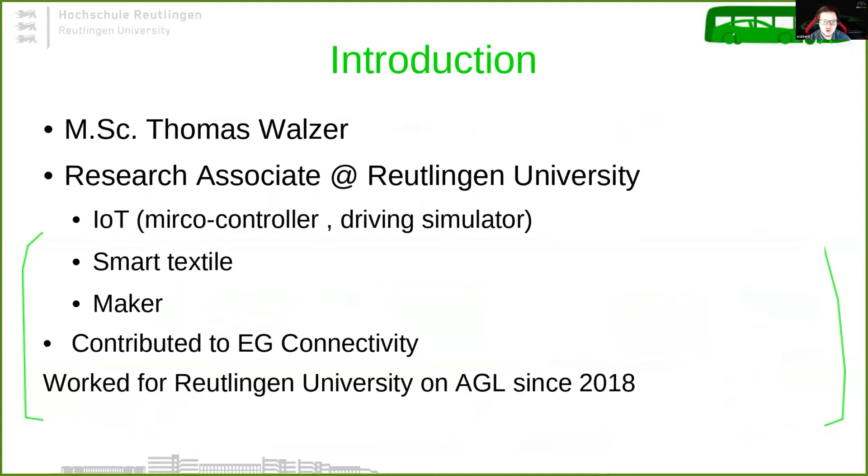So I worked for Reutlingen University on AGL since 2018. My work was from the sensor to the backend, all around AGL, with open source software and open hardware or our self-made hardware, and a lot of management of the students' projects. Before we started with AGL, we had a driving simulator from a PhD thesis. The focus was on the driver data and CAN data generated from it.

The purpose of this PhD thesis was the development of a driver assistance system. And we had no actual human-car interaction. It was just the notifications from the car. But that gave us the basic idea for AGL. I did my bachelor thesis on that topic, and I did something service-based on Java OSGi to have an infotainment system. And it didn't work that well, so later we found AGL and started.

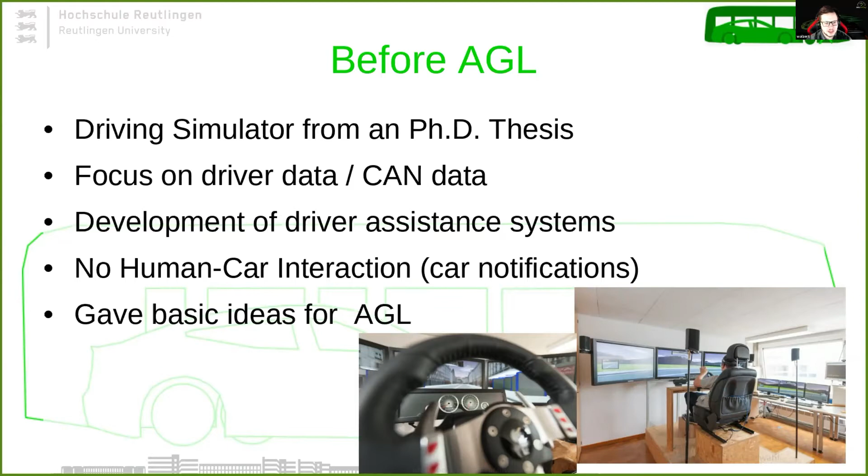Our vision for what we did at Reutlingen University was to create a modular driving simulator environment that could be used at Reutlingen University for topics in automotive research and education. It should be a framework for textile and design. We have interior designers, and all the time I saw their cool models but they just had paper slides or something like this in their model. And that was so annoying, because we from the computer science faculty had the technology to bring technology into it. And yeah, that was a bit sad. So that was the idea, to give them an environment or a framework where they could easily work on better prototypes.

We have mechanics and mechatronics at Reutlingen University, and they are working on ECUs and all the stuff. So the idea was to bring them together with us, the computer science, with the driving simulation and the knowledge of AGL software. So maybe the vision was to create a small virtual car company at Reutlingen University that is more based on interaction, ECUs, and interior.

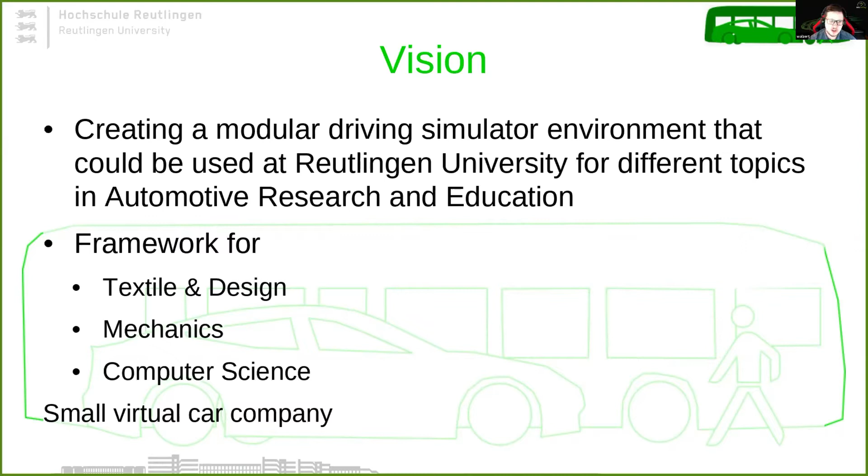So the vision of the actual driving simulator was a driving simulation that has only one connection to the outer world, so we shouldn't care about the simulation. We should have clear interfaces to get the values from the driving simulation into our system and back. The system should have AGL on board, at least in the IVI system, additionally with the IC. And it should be possible to make different car classes, for example trucks or small cars.

We are working with 12 or 13.8 volt power supply, as in a normal car at the moment, and it should be easily extendable with new hardware. For that, I designed an adapter for CAN modules for Arduino and so on via DB9 connector. And the idea was the image on the right side. So that was the basic idea when we started to create our hardware.

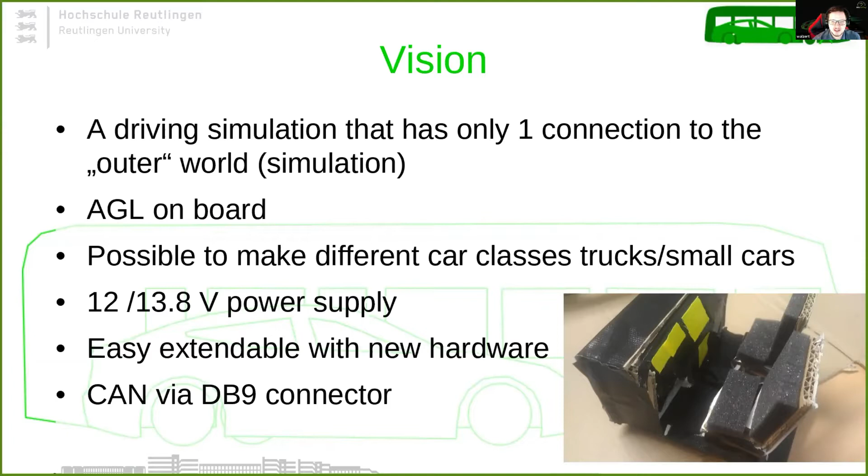And the concept for that was: we have a simulation. The simulation is connected via LAN to the car interface. You can see that on the right side. There's also the power supply for the 12 volts. And from there, we have the CAN interface that connects with different channels to the driving simulator. AGL, IVI, textile controls, and actuators are connected, for example, to one bus, the yellow; the gear, the steering wheel, and the pedals to another, the red one. So we want to separate that like it is in a real car.

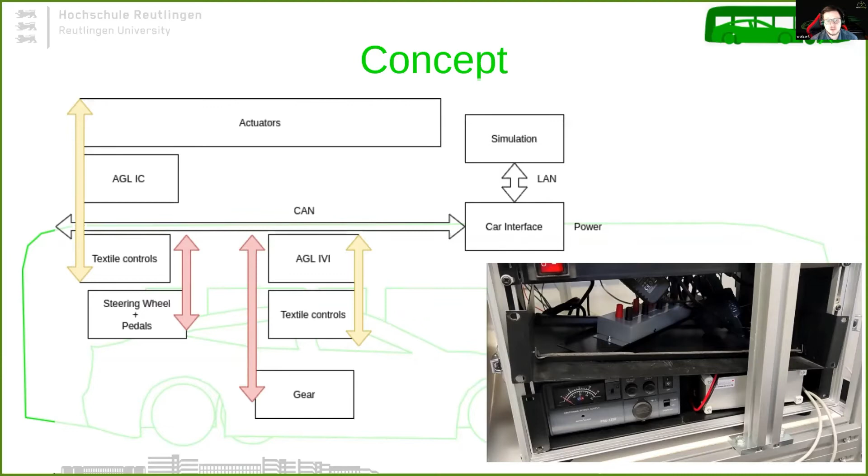So on the left side, you see the simulation that is just with a beamer. You see the backend, that was the part I showed before, and the red parts are on one CAN bus. So there's a steering wheel sensor with CAN bus, there are pedals, a shifter that was made out of a C64 controller, and you see the green parts here, AGL. The nice looking pictures are on the right side.

So you see the blue LEDs everywhere, and that is a smart textile. I will talk later about that. So it was a research project, and we worked on the topic of how to bring textiles into the car as interaction surfaces, to have a nice feel and not have the plastic parts. So yeah, we worked on that, and that is the prototype where we have it in.

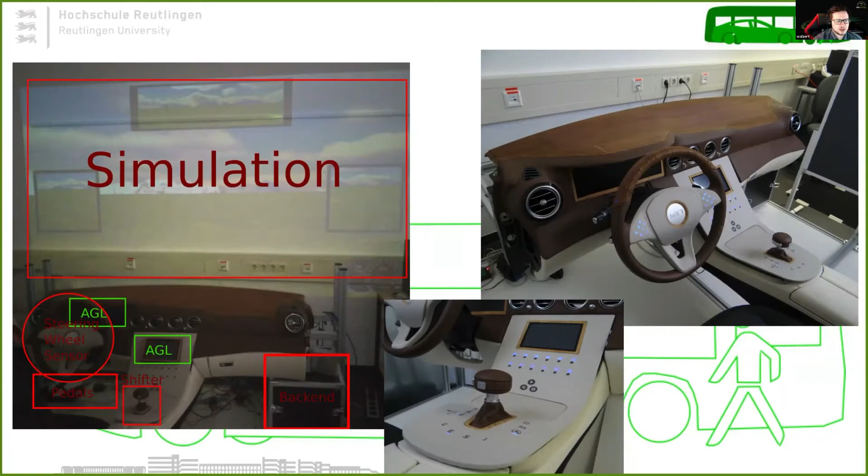So that is one part of the AGL platform. I was the maker, so sometimes it was rapid prototyping, not that polished. We worked on a CAN SL module, a socket CAN module with the microchip audio system and a touchscreen applied to that. On the left side, in the smaller picture, you can see our green box. Now it's formally black, but it's the same - the prototyping mobile development station that we had at Reutlingen University.

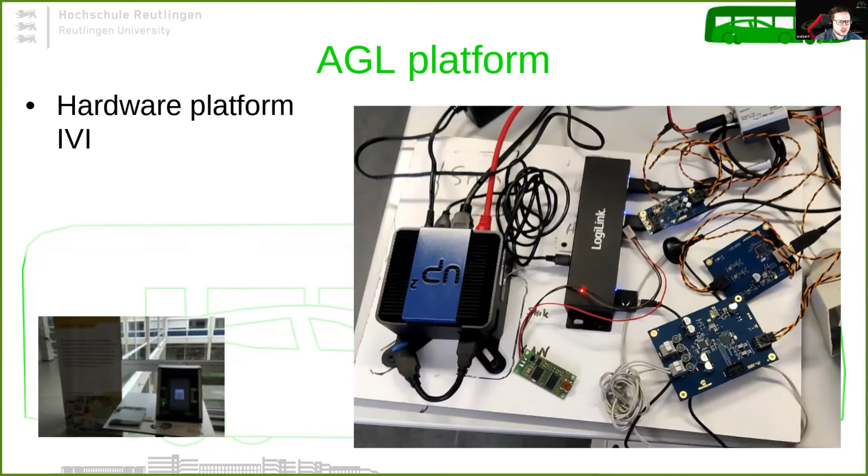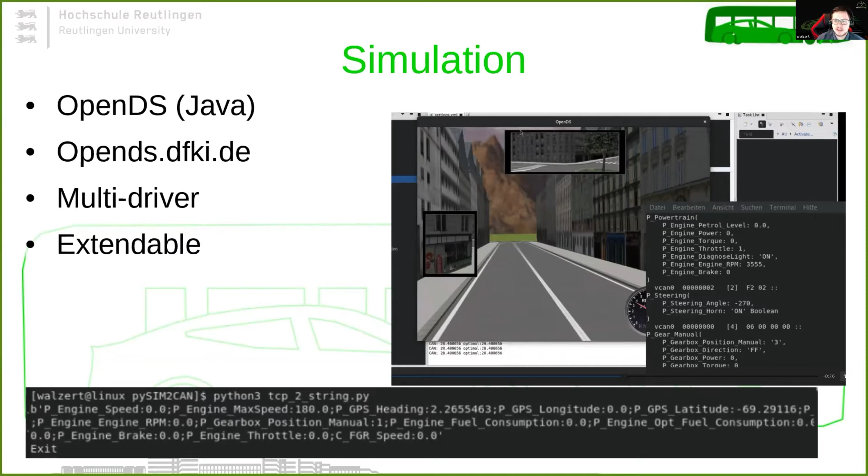So we send all the information to the next step, to the CAN interface. And then you can see in the terminal on the right side that we have the software that decodes or encodes the CAN messages from the TCP strings and sends it over CAN, here in that example on virtual.

So the CAN gateway where we're doing all this is based on the old driving simulator. We just ported the idea to Python and added a new CAN. The software opens a TCP server, which the driving simulation can connect to. The driving simulation sends strings with the car data to the server, so all updates of the driving simulation with speed, at an interval we can set, will be sent to the gateway.

The gateway gets the values and encodes them to CAN and sends them on the different CAN channels. We also have the steering wheel sensor that has actual CAN values, and we use those values, decode them, and send them to the driving simulator. So we could control the driving simulation with a real car.

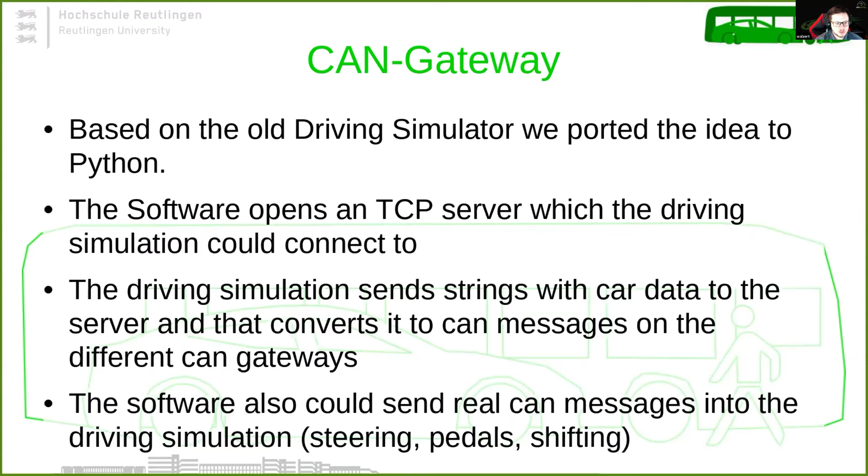The actual CAN gateway is a 6-channel gateway. It's working with the socket CAN drivers, and we have software prepared for the powertrain, the chassis, and the interior. So they are partly implemented.

On the left side, the motor and gear we get from the driving simulation and send to the CAN bus. The chassis network is where we get our real sensors and push those values into the CAN gateway to bring it into the driving simulation. We could use the distance sensor of the driving simulation and push that into the body, but we haven't done that yet.

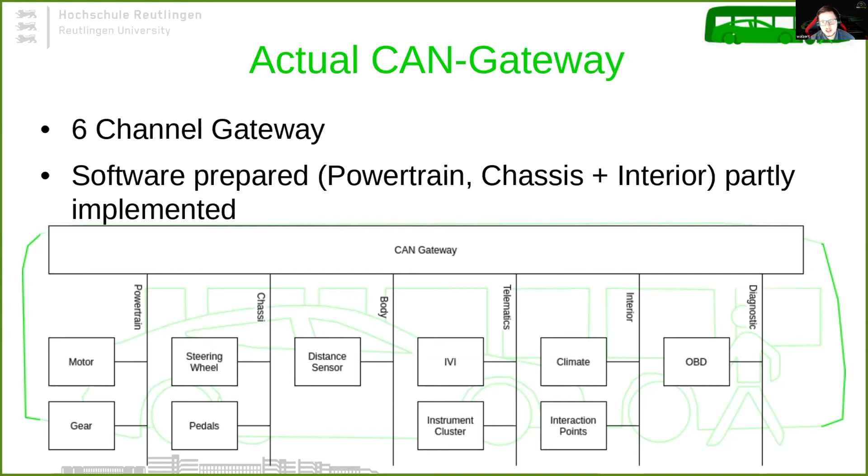And then we have a part with the telematics where we have the IVI system and the instrument cluster. The idea is to push all the important information from the other gateways into the telematics - that is, for example, the interior climate information that AGL could change, or our interaction points, interaction surfaces, that we could use the input of in AGL. And we have at least not implemented the OBD or OBD2.

What I did for all that was generate an AGL CAN format from DBC. So this is the CAN pipeline, and the idea was the students go and define their messages in CANoe, then create a database out of it.

We export that database and then use one part in our CAN gateway. So we just import that database via CAN Matrix and have the values in the CAN gateway, and can decode, encode it, and send the data.

The next part, where we did some work but it's not working at the moment, was converting that database to JSON, using a tool to convert that JSON into the right format for AGL CAN, and then creating and building the AGL CAN service for that.

So the idea was that in maybe 10 minutes you could create your new messages and signals and use them in AGL. Maybe add an Arduino with exactly the same information, and you can create a touch control or something like that.

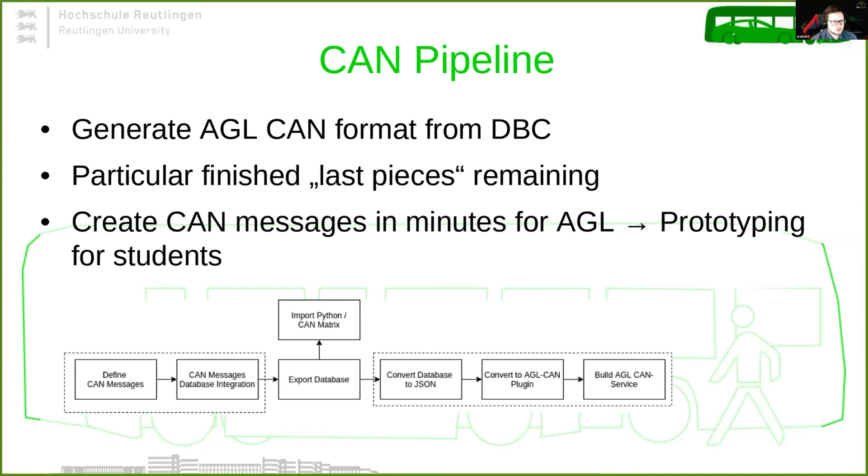So the system starts with PySim to CAN. That is the gateway software or server software we have at the moment. If that is started, OpenDS connects and sends a message, then the connection or simulation is starting.

We get the value from the chassis, from the steering, the pedal, and so on. Then AGL can connect to the car data and work with that. So that was the first prototype we did.

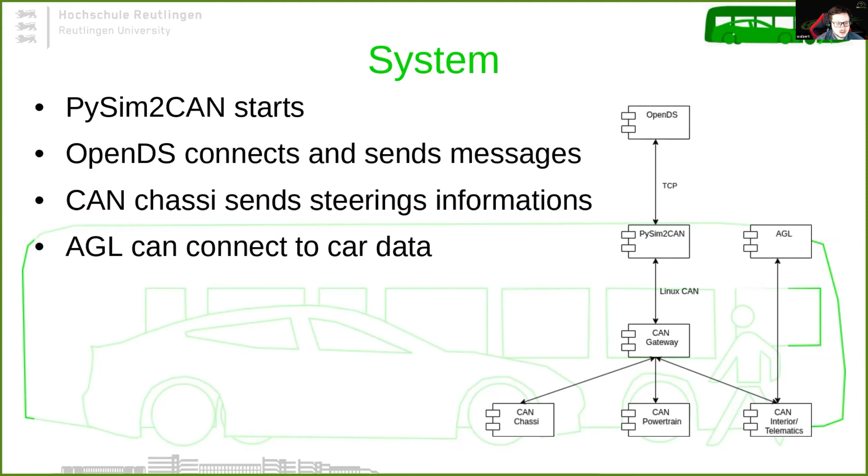Through the last year, I had to start bringing it to the students in a virtual way. So I made one VM. OpenDS is just a service, a software you can start on every machine. PySim to CAN and all the CAN gateway are virtual and in a VM. So we connect OpenDS with that VM and connect AGL through Cannelloni, which we included to the PySim to CAN connection.

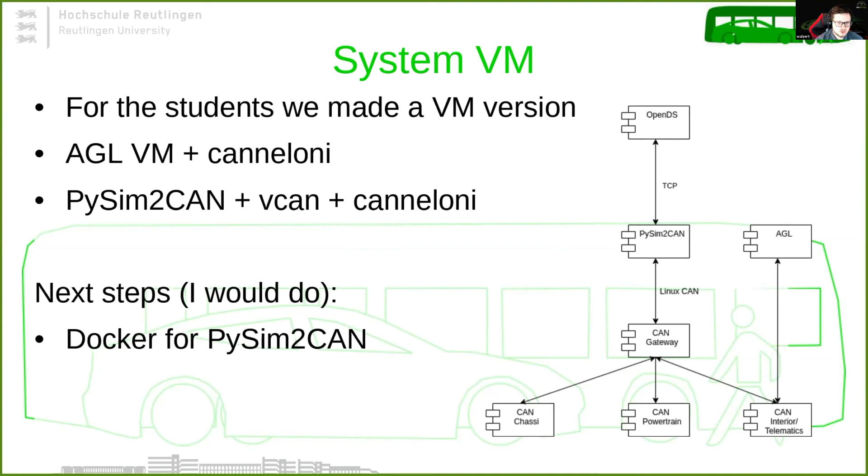So the next step I would do, if I could, would be to push all the Docker parts or all the stuff into a Docker container, because it was hard for some students to get VMs working. We had 5 different computers: on 3 the VM worked without problems, on 1 it worked with a bit of tweaking, and the last one wasn't working. So it was really hard to find a good configuration.

What I said before, we're using actual pedals, so they are on the left side where ADC. I converted the ADC to an Arduino digital signal, used an Arduino CAN device or CAN module, and sent the data. The steering sensor was sending the data directly. On the right side you can see our custom CAN adapter, a DB9 connector to CAN with 3 ports, a Y cable or Y adapter.

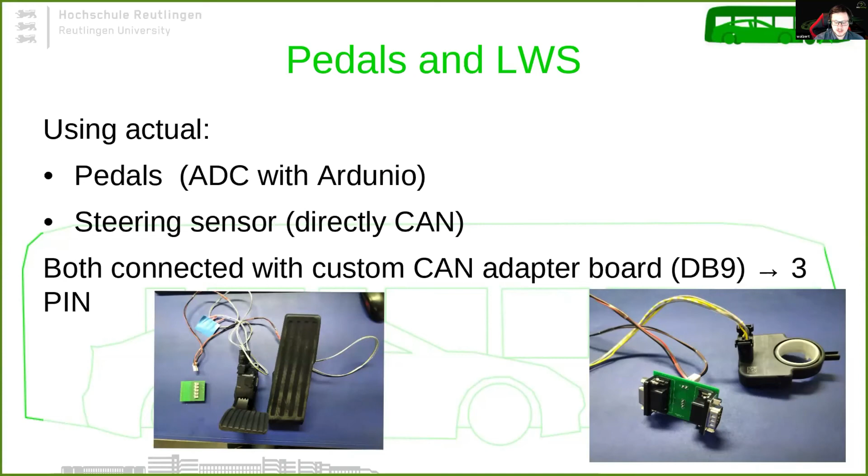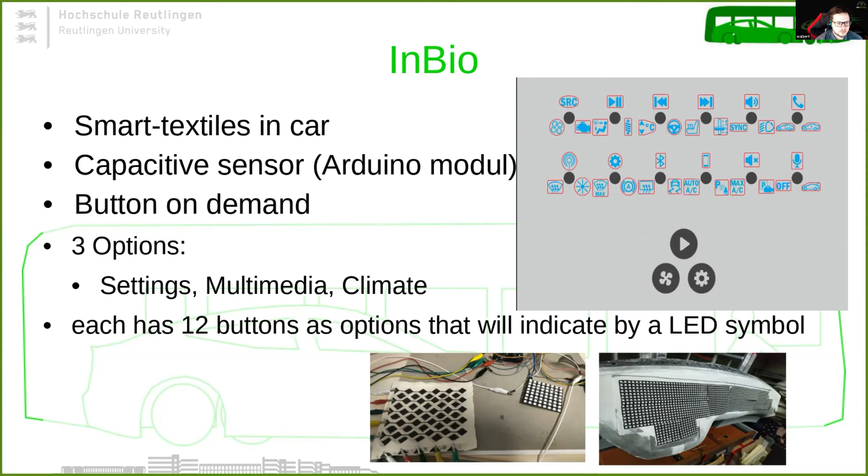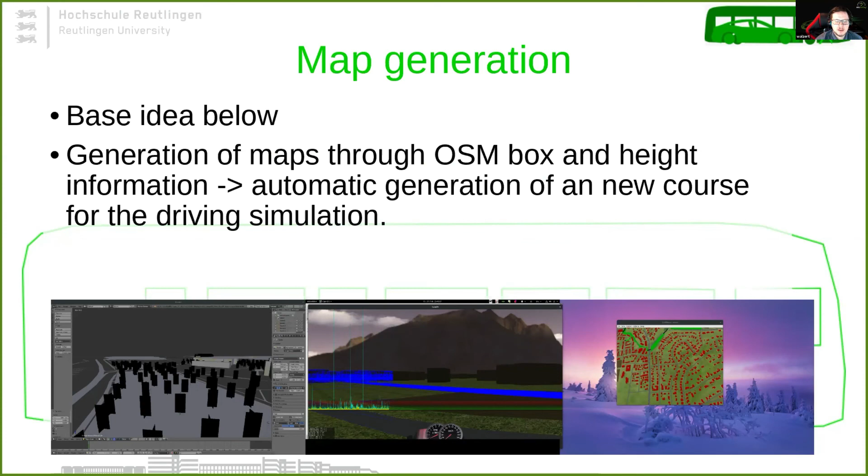One part of the driving simulation was the map generation. The basic idea is we just use one part of OpenStreetMap and generate that, so we could drive in every place we want and try parts. We made a bachelor thesis out of this, and that was the first try of it. The impressions of the work you can see on the right, there is the part of the map, and on the left side there's the presentation in the driving simulation through OpenDS. So you could use that.

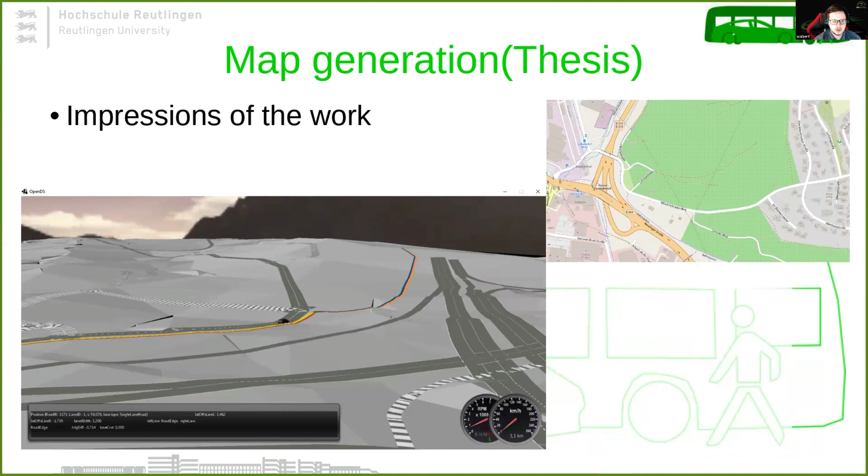What we also had, partly finished - but I wasn't at the university the last time, so I have to relay what they communicated to you - was to develop an HTML5 navigation app for a driving simulator. There was part of the algorithm or the AGL service, which wasn't taken further, but the UI, the interaction with the LEDs, and the side app did work.

The second project, I don't know the current state, was to develop an event-based system for interaction with the cars. So we used a gesture sensor and an extension for AGL, and a user profile for the radio to switch channels and volume via gestures.

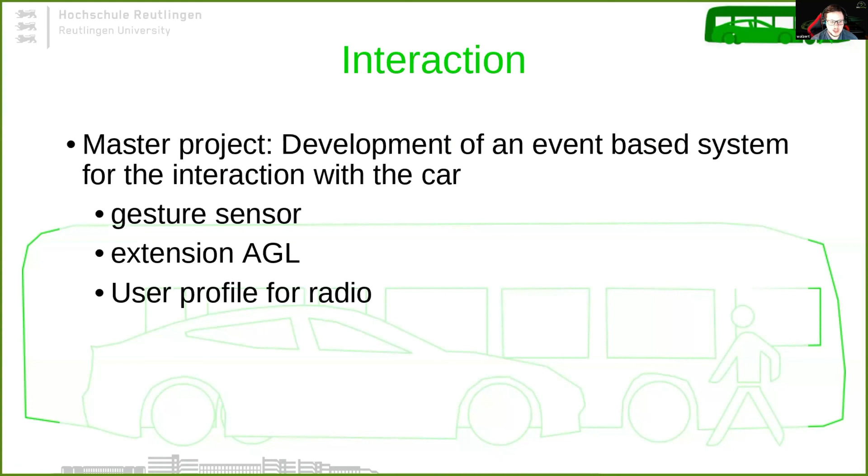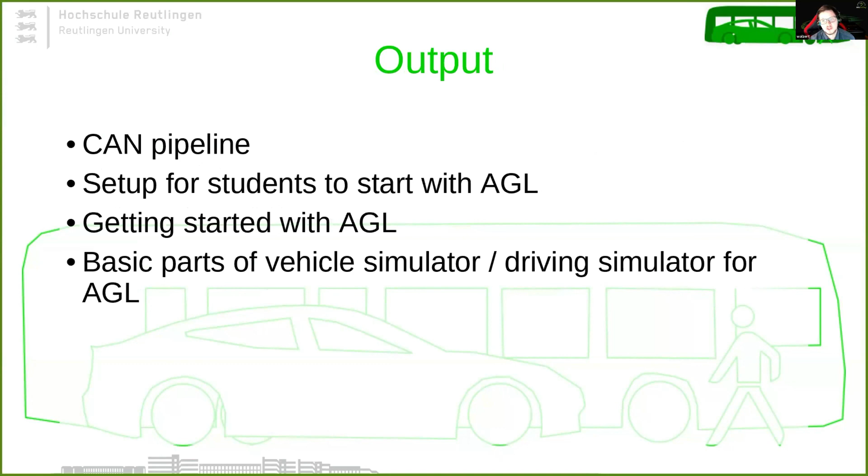So the output of what I did the last years was the CAN pipeline, the setup for students to start with AGL, a small getting-started AGL Git repo, and basic parts of the vehicle simulator, the driving simulator for AGL. Thank you for your attention.